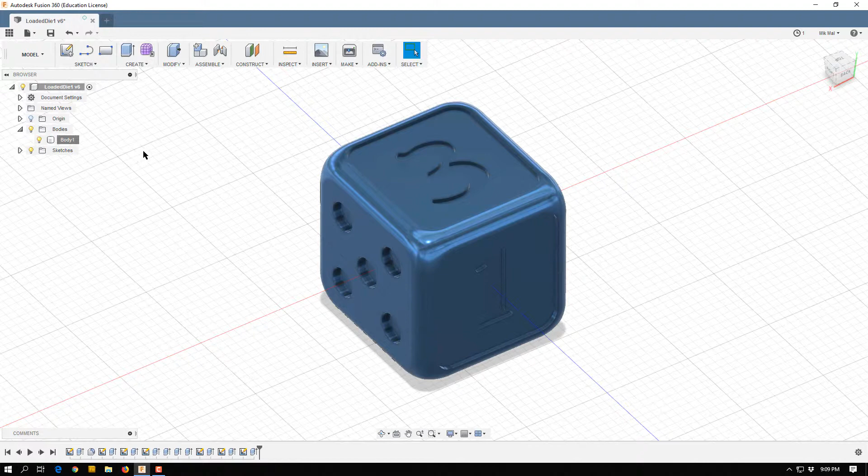So I'm going to start by making a new model. Whenever you make a model, you should always have a little bit of a plan of attack.

We're going to draw a square, make an extrude. That'll give us the base size of our die. We can then round some of the edges off.

After that, we'll put the 1, 2, and 3 on the sides by creating a cut extrude. Then we can put the 4, 5, and 6 on the sides with another cut extrude for each, using a couple different techniques for creating the dots. So we'll start by creating a sketch.

I'm going to create it on the bottom. We're working in millimeters, so I'm going to start by creating a center rectangle. Click right in the center.

I'm going to pull out. As you're doing this, you can actually type in dimensions. I'm going to make mine a 30 millimeter by 30 millimeter die. So I can type in 30, tab over to the other side, type in 30 there, hit enter. There's my 30 by 30 die.

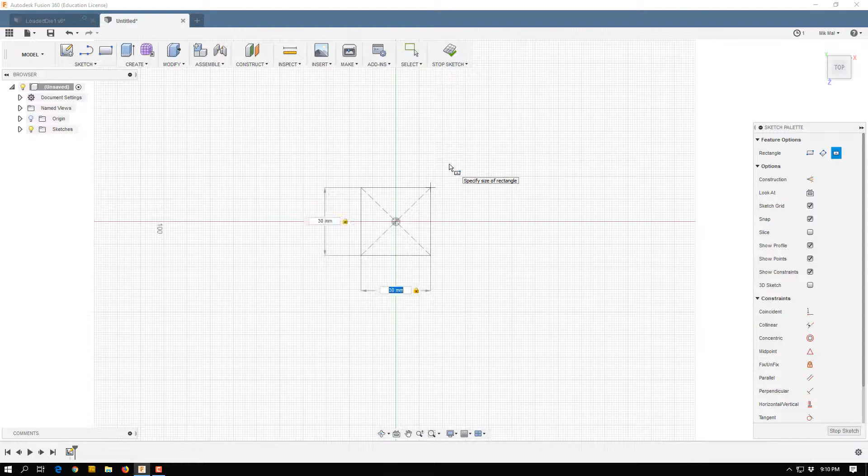You could also have done this and dimensioned it afterward. Or if I want to go back and change something, I can double click on these and make them a different size if I need to, but 30 by 30 sounds good to me.

So I'm done with my sketch. I'll hit stop sketch. Now I'm going to extrude it by going to the second menu, the create menu, and clicking the extrude button. Looks like a kind of skyscraper.

Now if we look at the extrude dialog box, it's going to ask us to pick a profile. Profile is really a sketch that we made, so I'm going to choose the square that I drew. I can choose more than one of these - I only have one right now, but if I had a more complex drawing with multiple sketches, I could choose multiple. Now it's going to ask me how I want to extrude this two-dimensional shape.

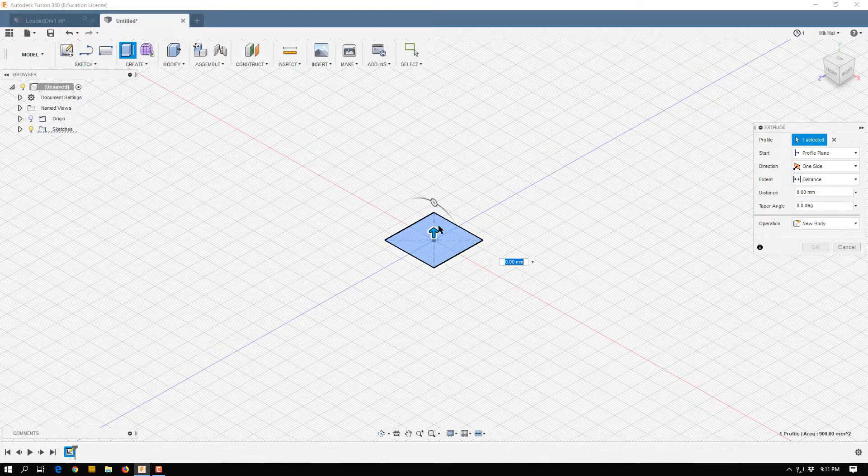Remember, extrude means to drag it into a third dimension. I can do this a few ways. One way is I can just drag - if you notice this arrow showed up, I can click on the arrow and drag it into 3 dimensions.

You also can notice that there is a number value here - this is the distance I just dragged it up, so I could type in a distance to extrude it. I could also come over to the dialog box and enter a distance where it says distance.

So I want to extrude mine 30 millimeters, but I also want to do one thing - I want to extrude it so that the plane I drew this on is directly in the center of it. So I'm going to go to where it says direction in the extrude dialog and switch it to symmetric.

I could also do 2 sides, or drag this side somewhere as well. Or if I do symmetric, whatever I do on one side, the same is going to happen to the other side. So I want this 30 by 30, but if I make my dimension 30, it actually just does 30 on the top and 30 on the bottom. There's also a second choice right underneath direction.

The choice automatically selected is half length, which means whatever number you type in goes on one side and the other side. If you click full length or whole length, the value you type in for the distance is actually the complete value, and it just splits it up for you automatically.

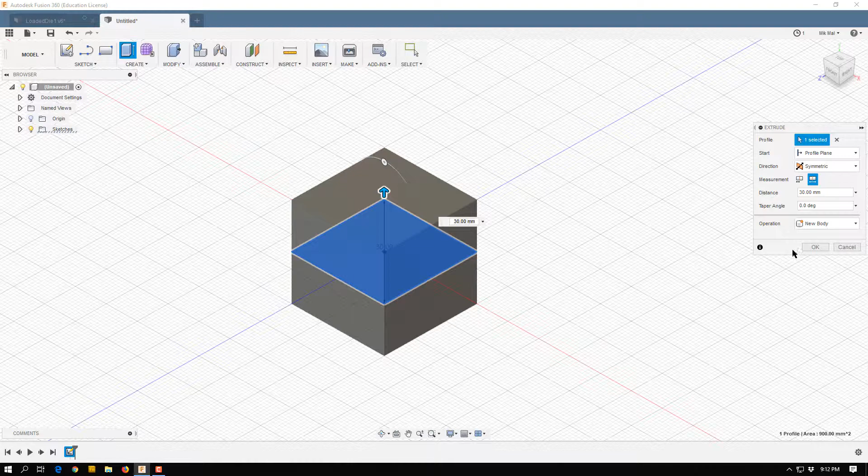So I'm going to choose the whole length version - my whole side is 30 millimeters, half on this side and half on the bottom. I'm happy with that, so I'll hit OK. Now we have our cube, and you can see that the plane goes directly through the middle of it.

So at this point, I'm going to round my edges. Sometimes you don't round your edges till the end, but because I'm drawing stuff on the side, I want to make sure that the stuff I draw is on the flat part, not on the curved part. So rounds are called fillets.

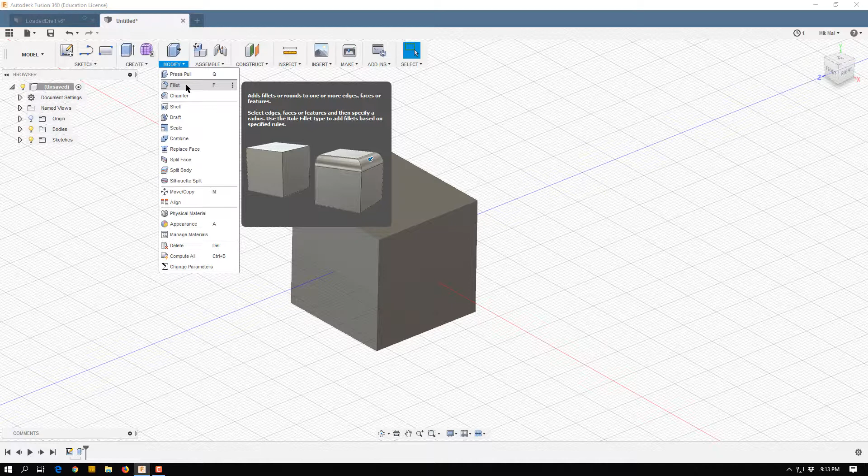So if you go up to the modify button up here and drop it down, the second one down is fillet. There's also an F there, which means we can use F as a shortcut in the future. So I'll click fillet.

Now it's asked me to click on whatever edges I want to fillet. I'm just going to click on all the edges of our cube. That's a cube, so there should be 12 total. As I'm clicking, you can see this number going up, keeping track of what I click, and they're also turning blue so I can see which ones I've clicked already. Looks like I got them all. I can check here, 12, I have them all.

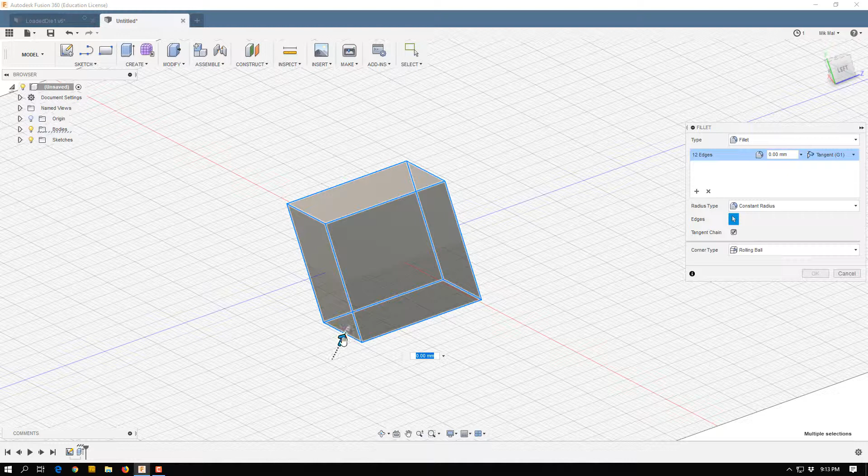So now I can grab this arrow and just drag it if I want to visually change this. I can kind of drag it in to where I want it. That looks pretty good. And there's also actually 2 types of fillets you can make.

If you go over here, spin this back to normally, to where it says radius type, there's constant radius and there's chord length, so you can kind of change either the radius of your edge, or you can define it by how far it is from here along the edge.

There's also a corner type. This is called rolling ball, where it's basically the same distance from the top to the bottom. They're all a quarter of a radius.

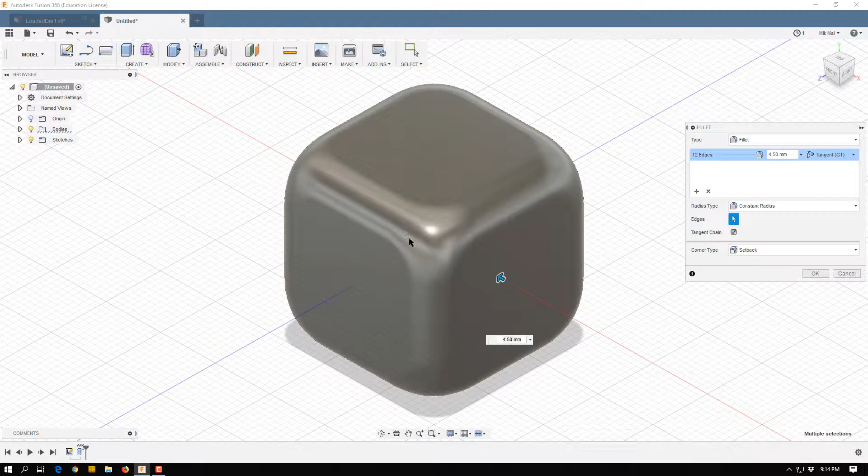If I go to instead setback, if you notice, look at what happens to the actual corners right here. They kind of are set back a little bit, and it gives you just a slightly different effect. I'm going to keep the setback effect. That looks good to me.

I'll hit OK. I'm also going to come down here and change my style. I'm going to add the edges just so I can see a little bit better where I'm going to draw my shapes. Alright, so now this is the base setup of my die.

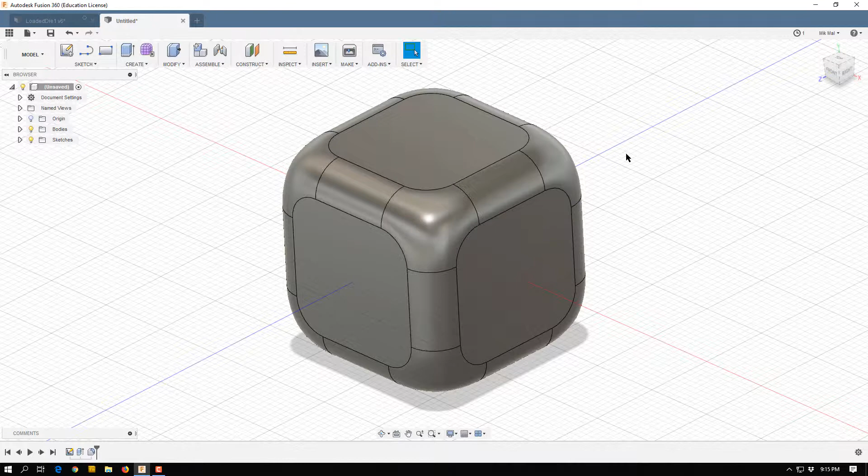Now I can start adding some numbers to the sides. To do that, I'm going to go back up and create a sketch. But this time, instead of selecting one of the internal planes, I'm going to select one of the sides, or one of the faces of this. So I'll pick this one.

And now I'm going to go to sketch and choose, instead of sketching shapes, I'm going to sketch text. I'm going to click where I want the text to start. This is where the bottom left of your text is going to be. So I'll click there. Now this text dialog pops open. It's asking me what I want to be displayed. I want the number 1.

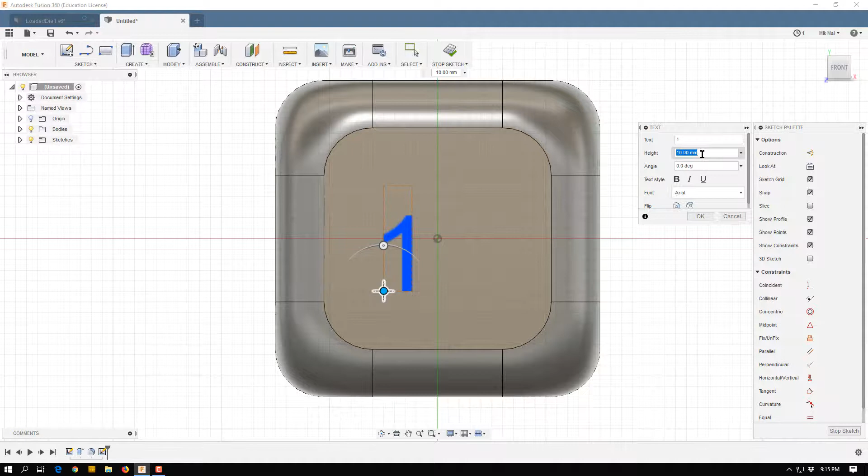I'm going to make mine a little bit bigger. Let's make it 20. See what that looks like. Seems reasonable. You can also change the font. Let's go there. And then I want to kind of center it, so I'm just going to grab this blue dot and drag it to where I think it looks good. That seems reasonable right there. And I'm going to hit OK.

And I'm going to stop my sketch. So now I have this sketch drawn, and now if I want to, I don't want it to sit there like it's painted on. I want to indent it into the side a little bit.

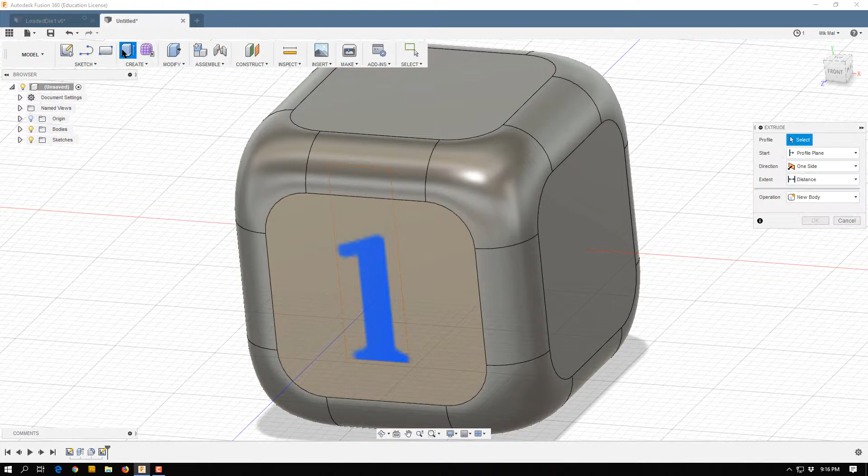So I'm going to go create an extrude, click on the number 1, and this time I'm going to drag it into the object. If you notice when I drag it into the object, it turns this pinkish red instead of blue. And if you look over here, the operation automatically switched to a cut. The last one, it was either a new body or a join. But because I'm going into the material, the program is guessing that I want to remove material instead of add material, which it was correct.

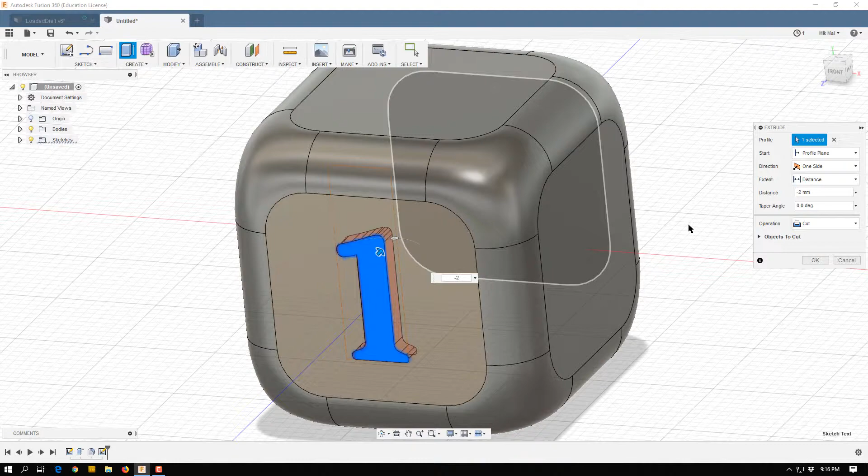I'm going to make this go in about 2, so I'm going to put -2 for my distance. I could have also dragged it that way. Either way is fine, and I'm happy with that, so okay. There's the 1. I'm also going to, actually we'll do the 2 over here.

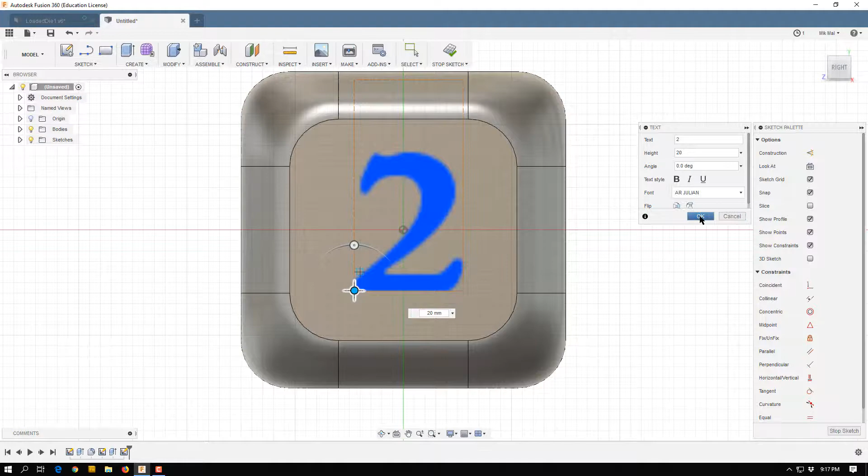So I'm going to create another sketch, go through this a little bit quicker. Put some text on it. I believe I made it 20, and I used Julian, and drag it so it's about centered. Happy there. Stop my sketch, do an extrude, choose the 2, and I'm going to type -2 this time because I know how far I want it to go in.

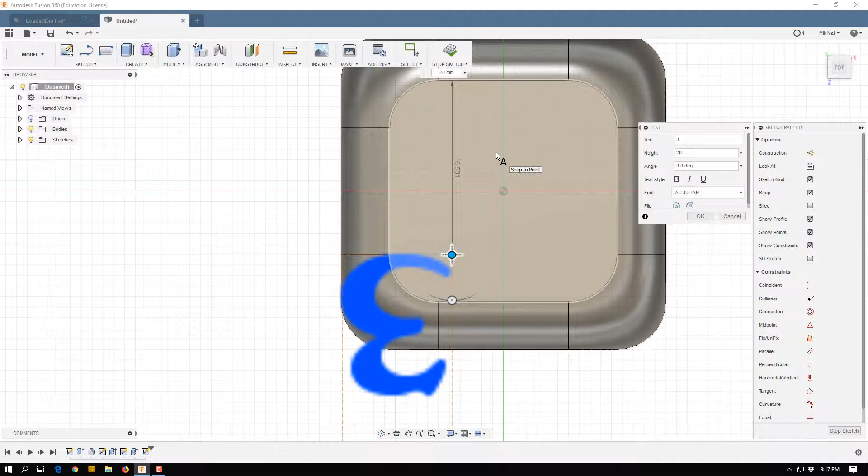And let's throw the 3 on the top. If you notice this time the 3 looks upside down, that's just because of the shape of my, or the way my plane's oriented. So I mean, if you want to keep it that way, it's perfectly fine.

I can just move it there and it's fine. If, for some reason, you want it the other way, you can grab this circle here. This moves around the number. This circle here, if I grab it, will actually rotate it around. I can rotate it 180 degrees, grab this again, and bring it back. If that's one of those things that bothers you if you can't see it upside down, but it's a die, so it doesn't really matter too much.

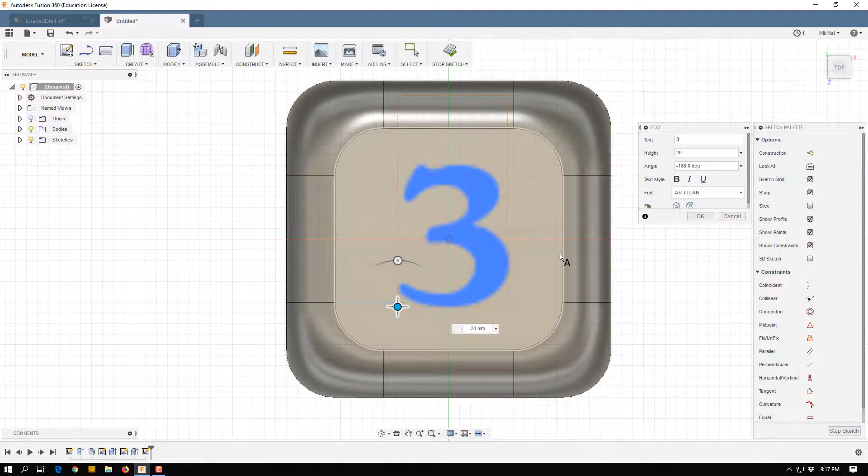That looks good. Stop my sketch. Click on the 3, extrude it in 2 again, and we're looking good.

Now, before I continue, I notice with these letters and number sides, I want to indent the face a little bit. So I'm not going to draw a new sketch, I'm just going to click extrude, click on this face, and extrude it 1 millimeter in.

If I'm extruding something that's already sketched, if I want to extrude a shape that exists on my model, I don't have to make a new sketch. I can just click on that shape.

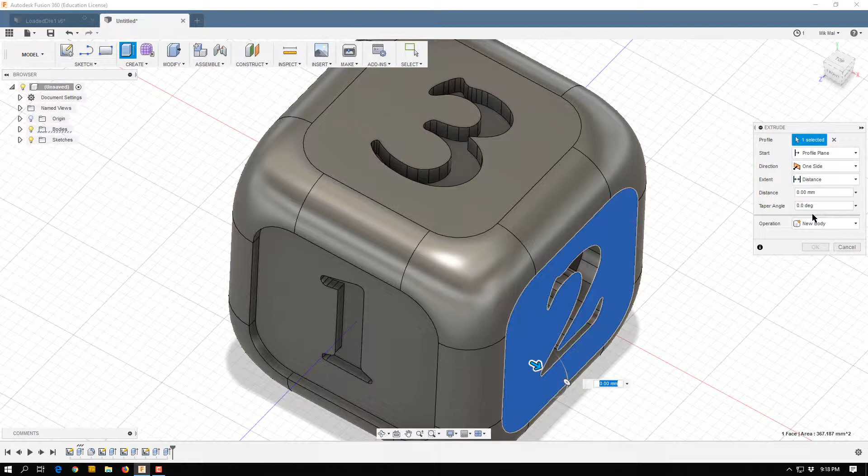So I'll do it with the other 2 sides, extrude it -1. And one more for the top, again -1. So now we have our 3 sides with numbers on them with a slight indent as well.

Now we're going to do the sides with the dots on them. Let's spin it around. I'm going to create a sketch on this side.

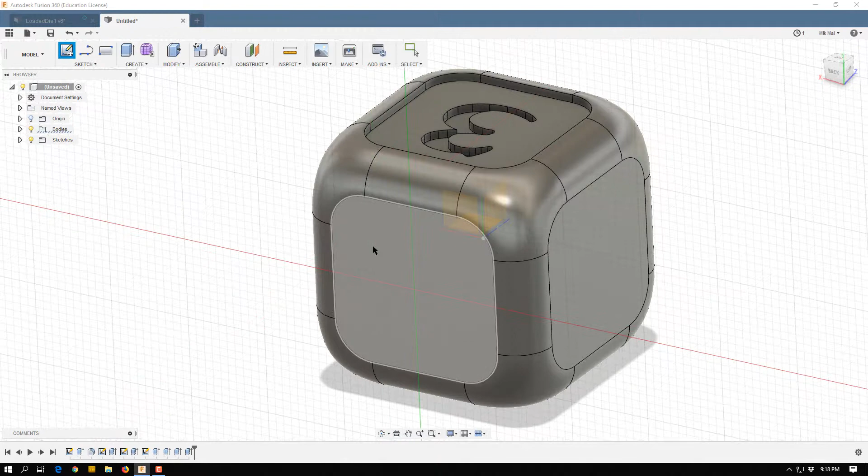Let's put 4 on this side. I'm going to do this just by drawing some circles. This is the non-fancy technique, I guess. I'm just going to draw a circle up here somewhere.

It doesn't matter the size right now, since we're going to show you how to dimension it to get the exact size. My circle's there, but it's not exactly where I want it. So I'll hit the D button, click on my circle and drag off, and there's the dimension.

I want my circle to be 6 millimeters. Type in 6, and the circle is now exactly that size. I can always go back and change it - that's one nice thing about these programs. They're parametric, so you can go back and edit the values as many times as you want.

I also want to tell the software where the circle is. It's right now just floating anywhere, so I'll use the letter D, click on the center of my circle, click on the center of my whole drawing where the two axes cross, and drag it up. Let's say I want that to be 5 from the center.

That puts it there. One more dimension, so I'll go from the center of my circle to the bottom. If I drag this to different places, it'll try to dimension it from that point to this point - it could be straight horizontal, straight vertical, or at an angle, which I don't want. I want the vertical part, so I'll drag this out here. Let's make that also 5.

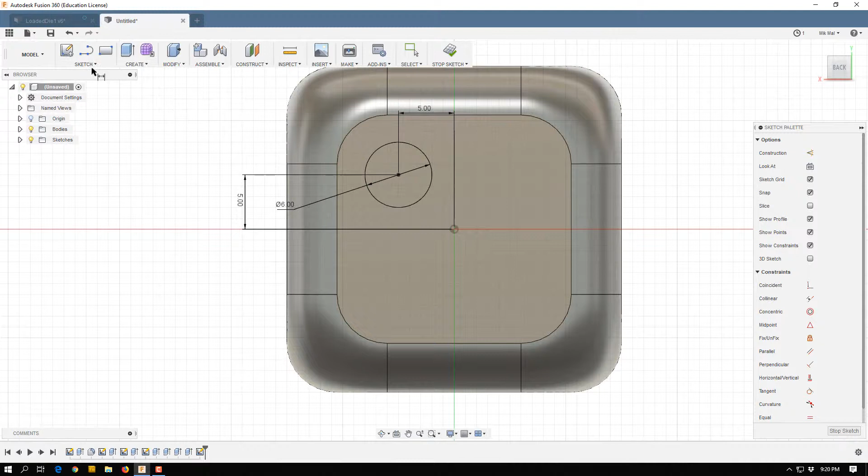So I have a circle there. Now I'm just going to do the same thing 3 more times. We'll do this a little bit faster.

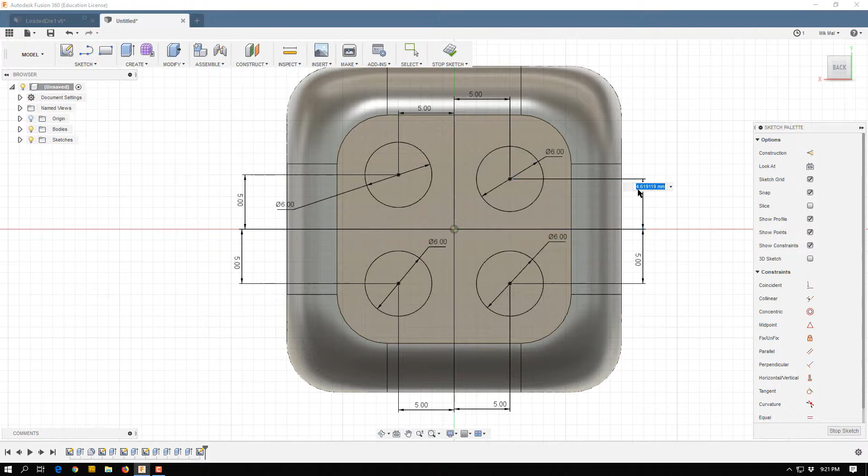Now you might have noticed that's kind of tedious - we're basically repeating the same thing again and again. Actually, this number didn't even get put in right, but that's okay. So I'm going to show you next how to do this a little bit quicker.

So I'm going to stop this sketch, and I just want to extrude these. Let's rotate it and extrude - I can click all 4 dots at once. I'm going to extrude them all in, so I'll put -1, and there are those 4.

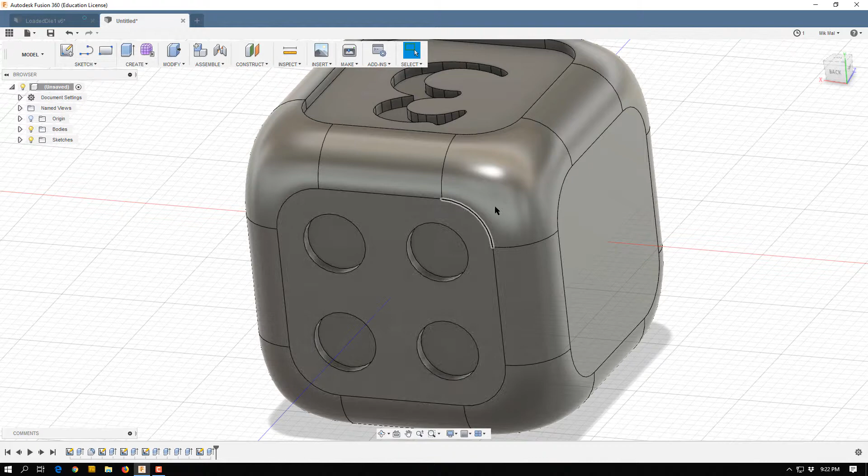So let's put a 5 over here. I'm going to create a new sketch over here, and start by creating a circle. I'm using the C shortcut now.

Put one right in the center, and I'm going to type in 6 as I'm doing this, since I want it to be about the same size. I'm going to create one more circle up here. You notice if you type while you're actually drawing them, it saves you a step - you don't have to go back and dimension the circle again.

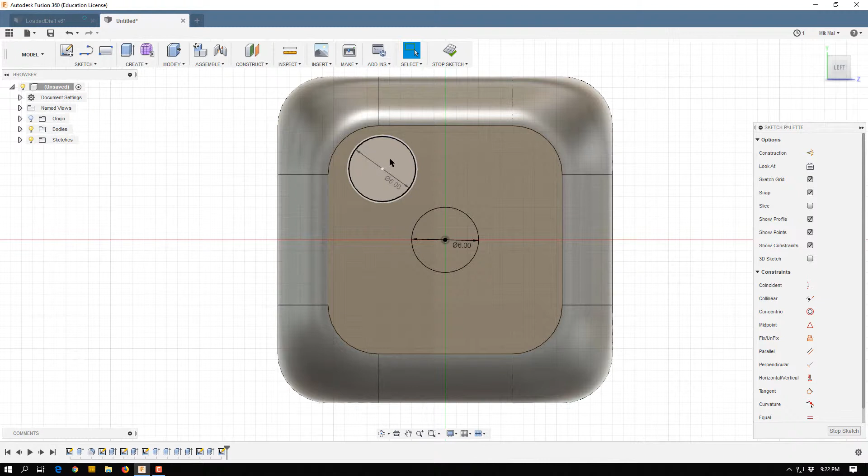Now I want this circle positioned the same way I did before, so I'm going to do a dimension from the center to the center. And I think we said it was 5 before.

So I'm trying to match the layout on the 4. Now I really want to take this circle and just do the same thing on the other 4. I can do that by using a pattern.

If I go back to sketch, move it down to where it says... I'm going to do it using a mirror. I can click on that, click on my circle. Now it's going to look for a mirror line, but the problem is I don't really have one because it doesn't let me select this up and down line.

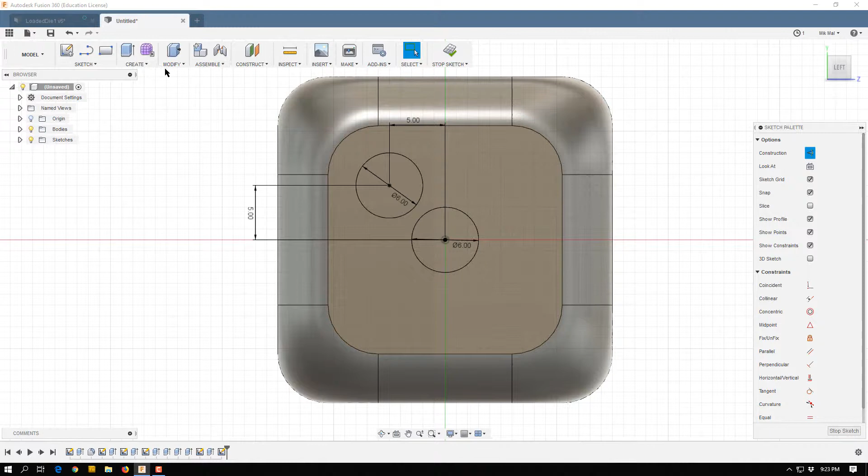So I'm going to back out of this for a second and create what we call a construction line. Construction lines are just guidelines that you can use to help you sketch things, kind of like when an artist draws lightly with a pencil, then goes over it with a dark marker for their final drawing. I'm going to go over to our sketch palette, click construction, and draw a line, letting it snap right to the center.

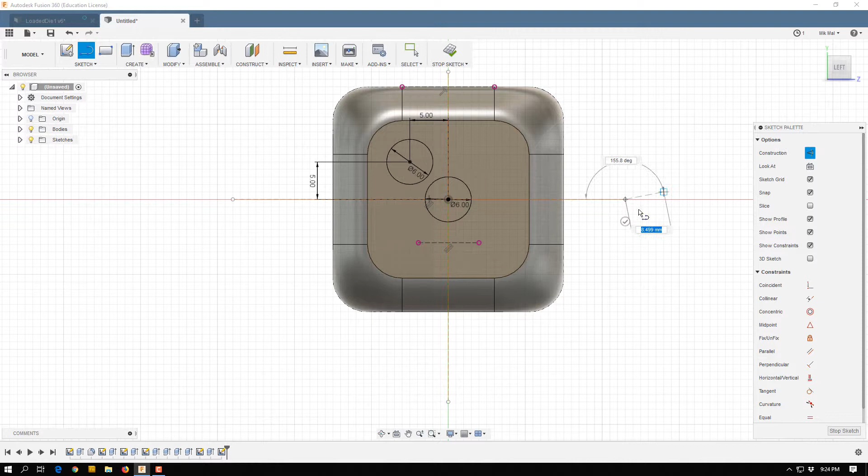I'm going to snap right to this green line and draw it completely vertically. It doesn't matter how long, and after I'm done, you can click this checkbox, meaning you're done drawing the line. I'll draw one more sideways, then uncheck construction because I don't want to accidentally draw more construction lines. Now I have these 2 lines crossing through this that will allow me to draw something a bit easier.

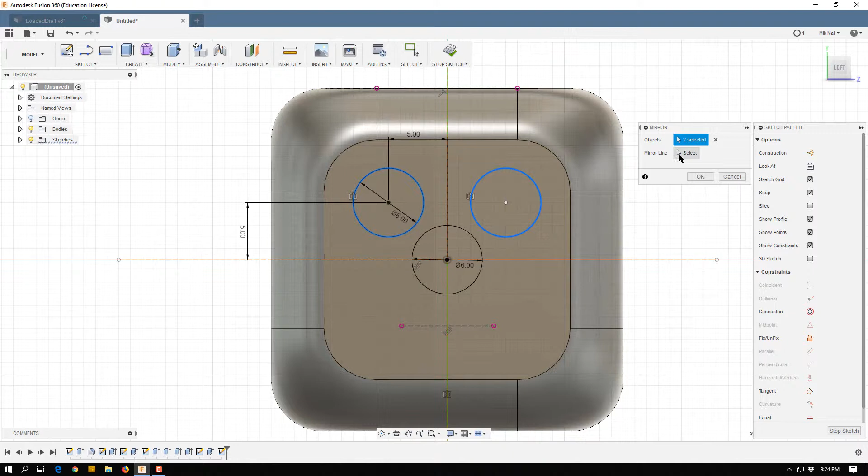Now I'm going to go back and do my mirror. I'll choose my circle, and when it says mirror line, I'll pick this construction line, and it copies the circle right across. I'll do a second mirror, picking both circles, and for the mirror line, pick the horizontal construction line, and it copies those right across. Now I have all 4 of my circles.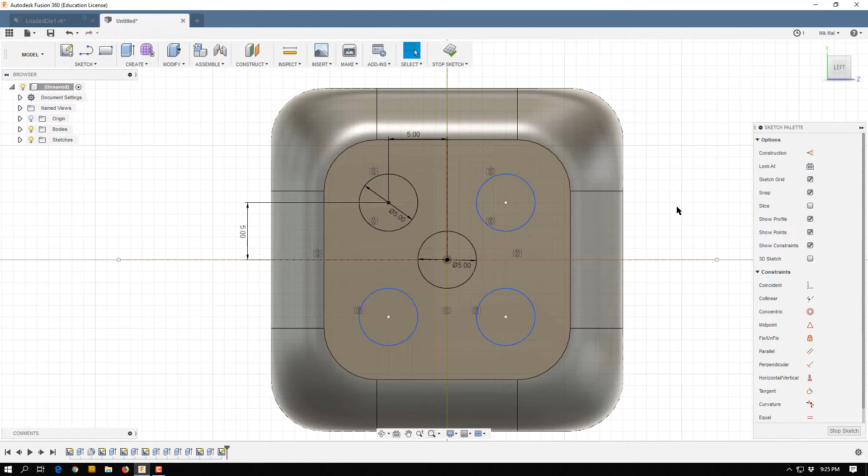Now it looks good. I'll stop the sketch, rotate a little bit, and do another extrude. I'm going to pick all 5 of these circles and extrude them negative 1. The last side we've got is the 6 side.

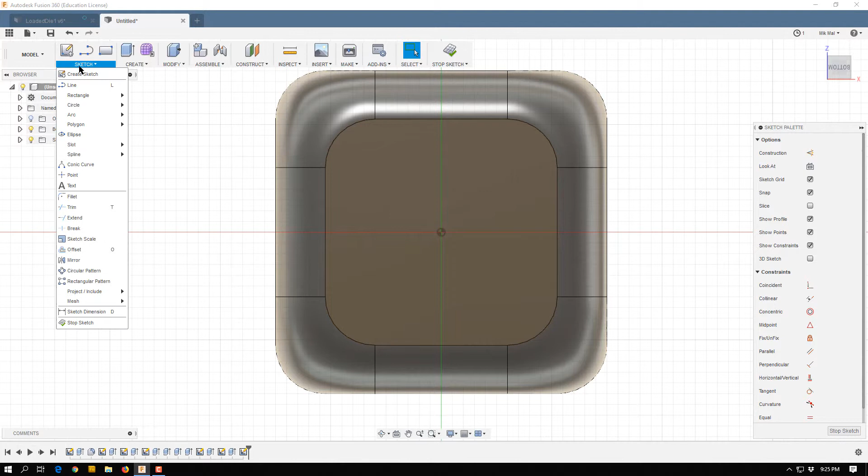I'm going to draw a sketch on this side. This time we're going to try to use a pattern where I can just draw one circle and create all the rest of them from it. I'll draw my center circle up here somewhere, it doesn't matter exactly where. Let's make this 5 since we're going to dimension it in a second anyway.

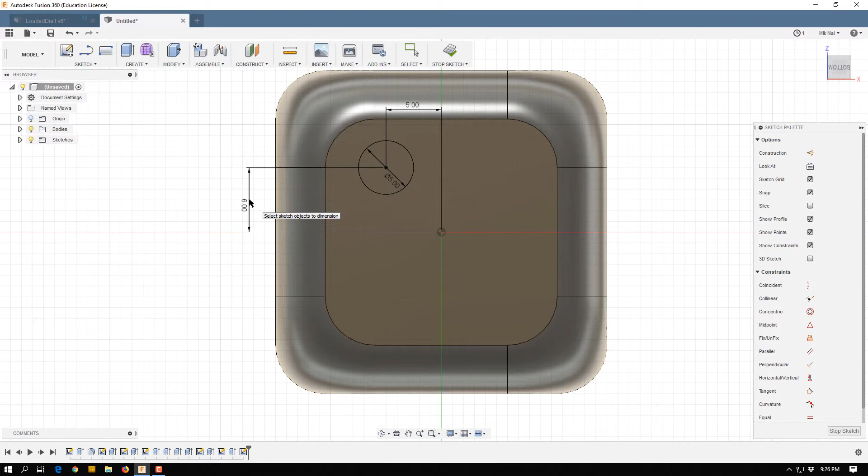Hit D for dimension, and I'm going to dimension it with respect to here. Let's start with 5, we can change it later if needed. This time we're going to go up a bit farther, I'll go up 6 so I have more room.

Now I'm going to go to the sketch again, and near the bottom there's something called a rectangular pattern. I'll choose that and select this circle. If you notice, 2 arrows pop up, and if I take one and drag it, it makes copies of that circle. In this case, it's set to make 3 copies, 10 millimeters apart total. I only want 2, so I'll change the 3 to a 2, which gets rid of the middle one, and it looks pretty much centered.

I know it's centered because it's 10 millimeters and I started 5 from here, so if I go 5 in, that's the middle, and 5 more puts me at the same spot on the other side. So that's how wide I want them to be.

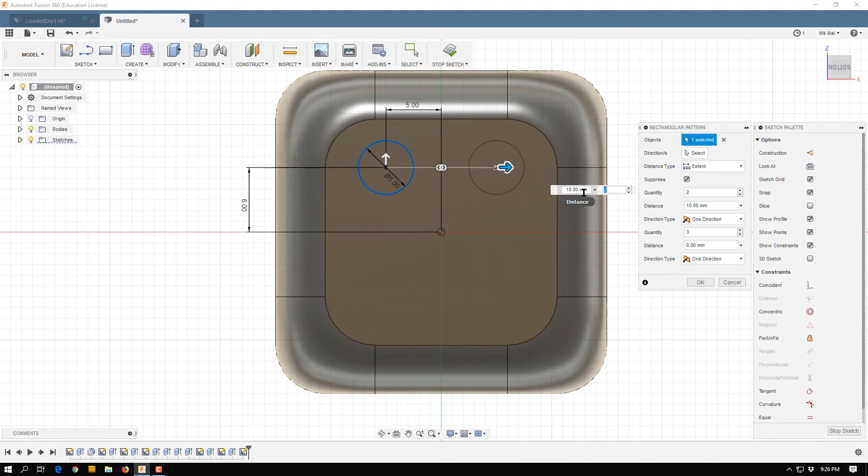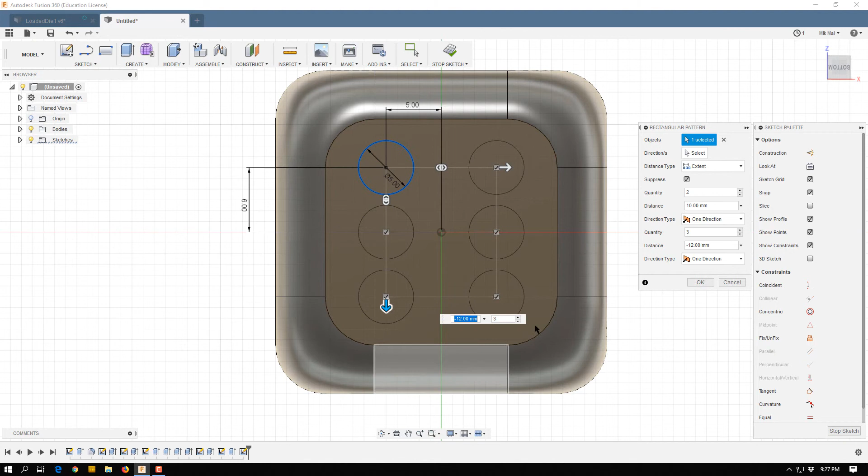Now I can grab the other arrow and drag it down. As I drag it down, it makes multiple copies again, and this time I do want 3 of them. I started 6 up, so I want to drag it down a total of 12, let's go down one more, so it's symmetrical. Now I have 2 columns, 3 rows, separated by what I want, so it's looking good.

Hit enter, stop the sketch, and I got my 6 holes, or 6 dots, all done with just 1 circle. Our last step is just to extrude them all, go in 1, and we finished our die.

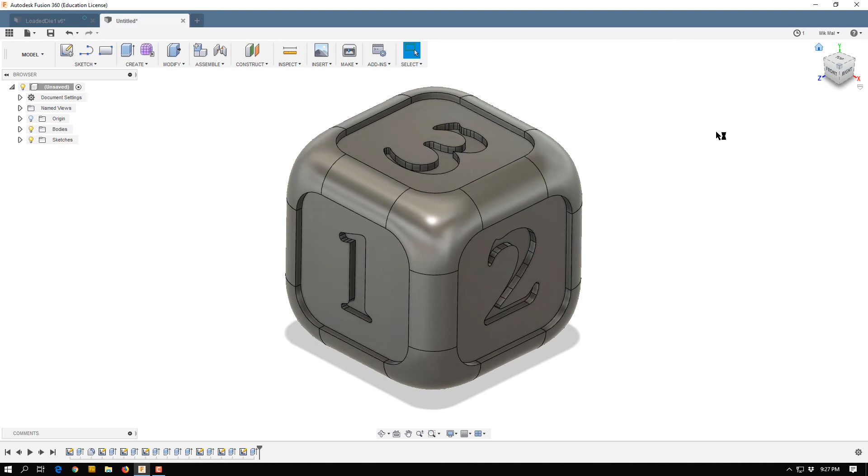So we'll spin it back and look at it from the front. See our die, we have 1, 2, 3 in number form on 3 sides with a little indent, and we have 4, 5, and 6 on the other sides.